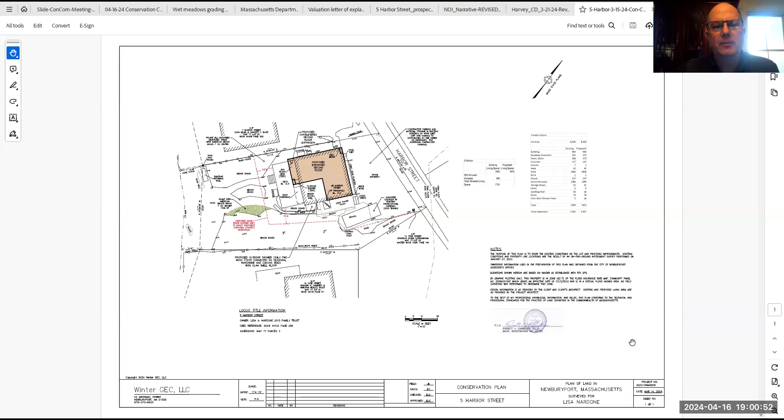The other thing we did is we had the structural engineer's letter updated to reflect the plan as submitted, so it doesn't have the expansion of the deck included in it anymore. So that simplified that. The only other thing I want to note is on our site plan, the planting area that's shown, we don't intend on doing that with the RDA. That was originally put on there because we were going to be proposing a shed. If we do come back in with the shed, we'll be putting the planting area back in for that. But there's no impact outside the footprint of the home. It's a pretty straightforward plan at this point. And we have plenty of driveway for the dumpster and contractor parking, et cetera. So we do not anticipate any impacts.

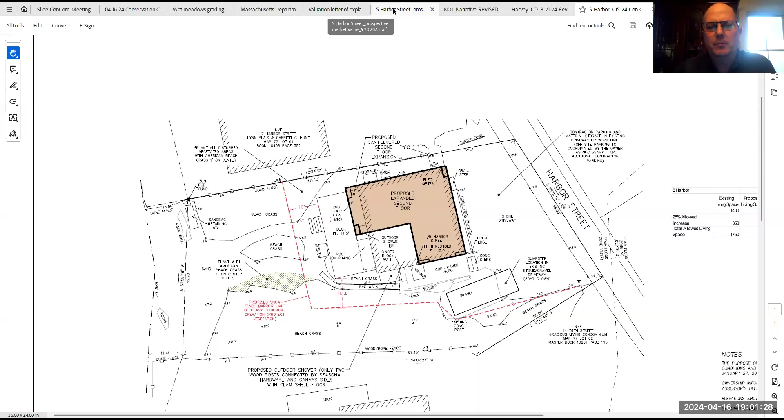So I think at this point, Tom, because we only got the information late this afternoon sometime, we're probably going to continue this just because we haven't had any time to look at any of the documentation. Yeah, I mean, that's fair enough. What we submitted is pretty straightforward, and the valuation letter of explanation is, I mean, it's literally got it

all in one paragraph. Somebody's got loud music playing. Yeah, sorry, that's me. Listen to us, Carol, please.

So if we go a little bit further, I think there's a paragraph that pretty clearly lays out. So right there, as-is market value is 1.28, but you take out the land and you end up with 630,000. And then when it's all done, it's worth 1.45, and the improvement's 800. So it's less than a 50% increase in the value of the improvement, which is the building. Okay. So that's pretty straightforward.

Again, I don't want to push the commission past its comfort. I acknowledge we just got that material into you. I got the last piece of it on Friday. I was out in the field all day Friday, and obviously yesterday being a holiday. So if the commission's uncomfortable moving forward... but the information's all there and it's all supported by Greg Story's typical highly detailed

reports. And then the structural letter is essentially what you saw last time, saying that the foundation is fully capable of supporting the addition. And it just removed reference to work that was related to a deck expansion. Okay. All right. Anything else? No, that's it. So if the commission is comfortable voting, we'd love that. If not, then I would certainly agree to a continuance. I'll leave that up to the commission and your discretion.

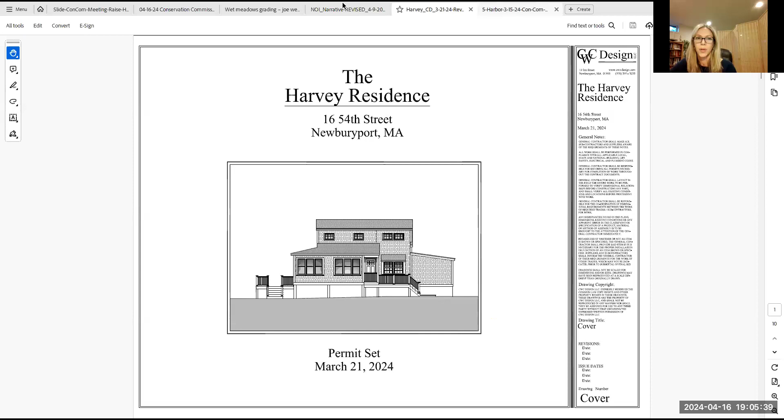Maybe that's it. So, okay, now we have Chris Crump, who is the project architect, and it looks like Dan Wells from LEC Environmental, who is the consultant on the notice of intent. This is the revised notice of intent, which we received this afternoon also. So why don't you all run through this with us and give your presentation on the project. I also have the project plans up here. Good evening. Could I share my screen? This is Dan Wells. Yep, sure. Great.

All right. Thank you very much for meeting with us tonight. I'm Dan Wells with LEC Environmental, and Chris Crump, the architect, is here as well. I just wanted to start by giving a quick overview of where the project is located. You can see it's right above the town line with Newbury, and it's right on the edge of the Merrimack River. And this is a zoom-in aerial photo of the lot, 16 54th Street. The project is a small addition extending off this corner of the house. It's 116 square feet in extent.

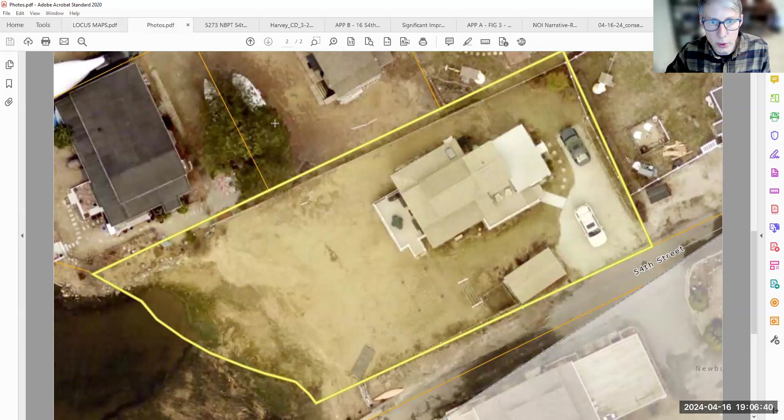This is a photograph of what it looks like there today, and the addition would go just right in this area, just extending off the house. And these existing plants would be temporarily relocated and then replanted at the completion of the addition.

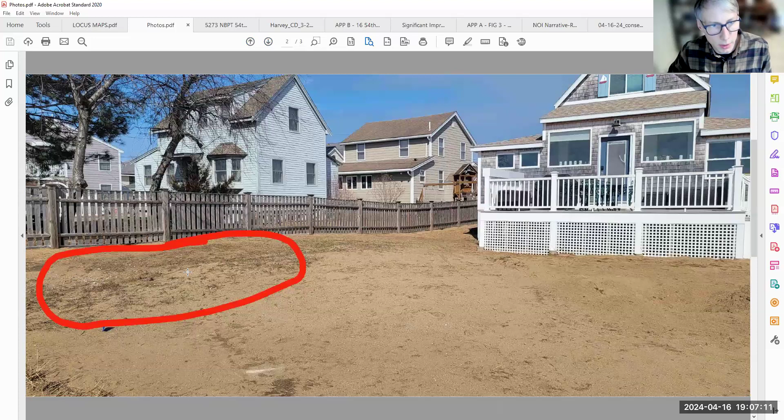The project's also going to be providing some mitigation. This is a part of the backyard, and this is going to be planted with American beach grass in a square footage, 1-to-1, 116 square feet of American beach grass, which is going to enhance the coastal dune.

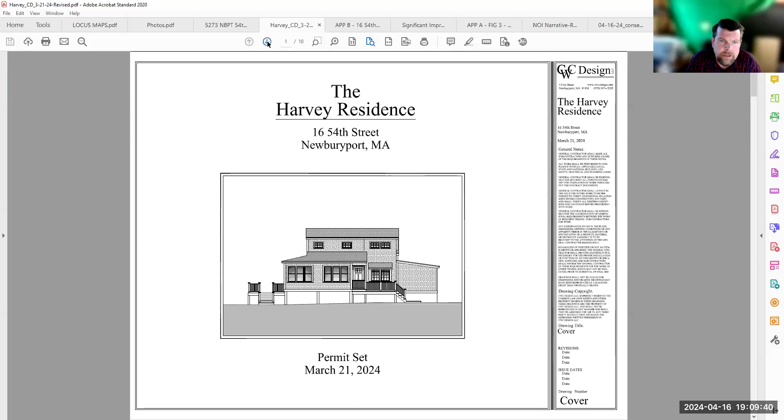So if you were right in front of the front door, there's a deck there, and the expansion would come out just even with that. So the tricky part about this is the existing floor for that dining room and mudroom and the kitchen area is in fact not 2 feet above floodplain. It is into the 2 feet above floodplain by approximately 4 inches.

And so what we are looking to do to be able to get this above the floodplain is we're going to continue the floor of the living room over the existing floor of the mudroom and dining room to get the new construction 2 feet above the floodplain. And that would raise the floor up in that area to make sure that the new construction is above the floodplain and meets all criteria for that aspect of it.

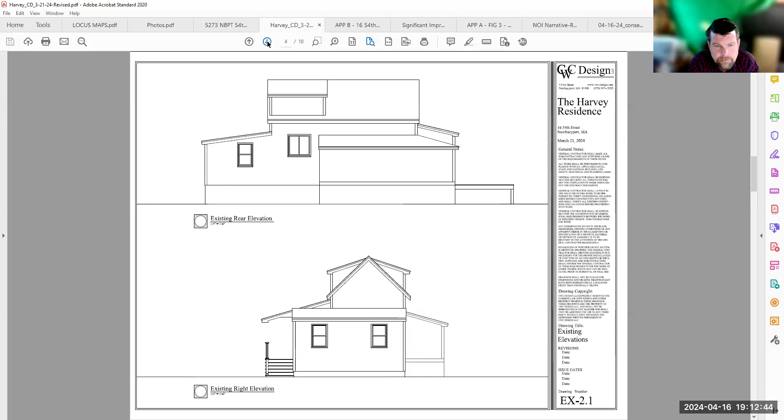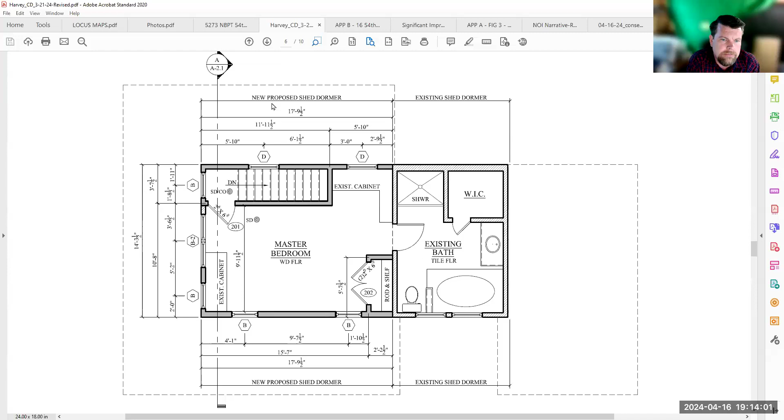And the next slide. And on the second floor, we're reconfiguring the stair that goes up to the second floor. Can you zoom in on this a little bit? There we go. Perfect. So you can see at the top of it where the proposed new shed dormer is and where the existing shed dormers are. There are existing shed dormers on both sides of the existing house. We're just extending the existing shed dormers all the way across to provide more headroom upstairs, because right now the walls on the top and bottom of that floor plan are about 2.5 to 3 feet high. So we're just trying to create more headroom. Next slide.

There we go. So this is what we plan to do on the proposed addition. The new addition on the first floor, the joists would cantilever over the existing structure that's there now, and then we'd have pilings that go in on the outside corners of the addition to give them the necessary structural support. And so everything would be open to below. There is an existing foundation under the main rectangular box of the original house. But there are no mechanicals in the basement anymore. They moved them all up above.

So there is just literally an open crawl space that's probably about 5.5 feet high, I think. The owner said that she's 5'4", and she can stand up in it, but that's about it. She almost hits the ceiling there. So it's a very low crawl space underneath the existing. But the wraparound lower level that you see on there existing is all on pilings already. So it's just the original center core that has a 5-foot crawl space underneath it.

So in this concept, we're not increasing the existing main ridge height. And we are minimizing as much as possible the extension of the proposed addition. We wanted to just square it up with the existing deck. We didn't want to push it out any further than that, trying to make sure that we don't take any more land than we need to expand this. Again, as Dan mentioned, it's about 116 square feet of additional first floor space. The next slide. I think that's about it.

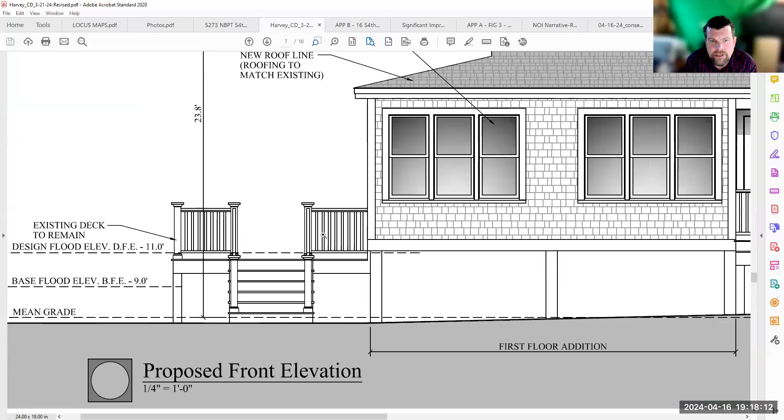Okay. Will the entire first floor now be 2 foot above the base flood elevation? Nope, the new construction will be 2 feet above, the new construction addition of the 5 feet going out. If we can go back to the floor plan, please, and just zoom in on that a little bit. Okay, so that whole entire dining room, mudroom area will be up above the floodplain, including, if you just scroll up a little bit, the existing living room is also above the floodplain.

The existing structure, you'll see on the left-hand side, there's the words 1 step down. That's the existing kitchen area. It would step back down into the existing kitchen. Now, that mudroom portion that you're going to be constructing above, are you going to leave the existing flooring? Yes. Okay. It'll only be the existing structure that's there. Any new construction would be on top of and 2 feet above the floodplain. The bottom of the new structure would be above the 2 foot floodplain elevation.

Did you consider bringing the rest of the first floor level, not having this step, but putting everything above the floodplain? We did, but that's a full kitchen that is not extremely old. I don't know when it was done, to be honest with you, but it was done at some point. To take that and raise it up would put us way over the construction costs of what we would be allotted to do on this project.

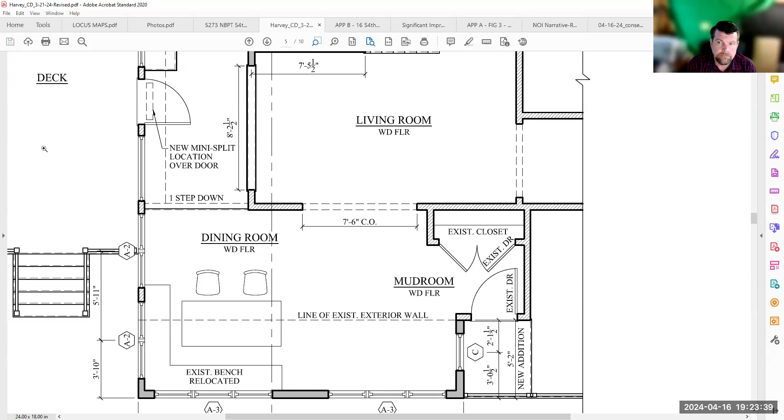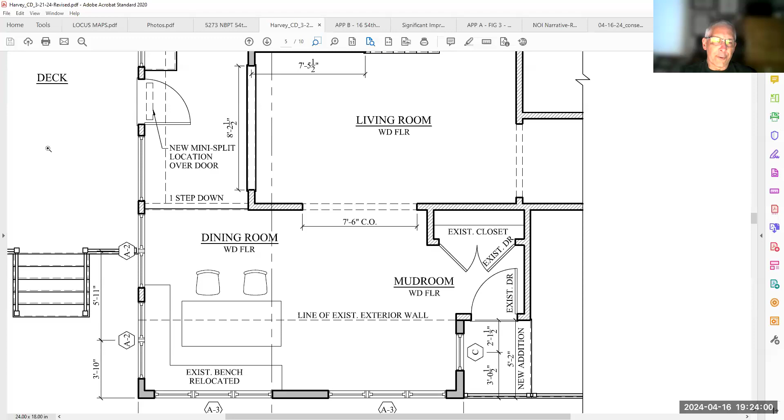Also, just for an FYI, we're not gonna vote on this tonight just because the last information we got came in at 4 o'clock, and we needed it at least a week or 2 weeks ahead. I can't remember, but anyways. Understood. I totally understand that.

And because we haven't seen that documentation, I don't think it was ever on the website for us to look at. Which one, sir? This is what would have been uploaded today, this form. Yep. So that form is good, but that doesn't really mean anything to us unless we have the post-construction appraisal. So you only gave us the existing conditions appraisal, and what we're looking for is a comparison between existing and proposed. And so that form doesn't tell us that either.

This was the appraisal report, so I guess that wasn't clear to me. So they reported the property value is 1.2 million, and then the improvement value is 408,000. Yeah, that doesn't represent the proposed conditions. Well, you don't just add that to the. When I looked through this appraisal report, a couple things became clear. There's one appraisal, the appraisal of the existing conditions. It shows that the property value, the entire property, meaning the land and all the structures on the land, is 1.2 million.

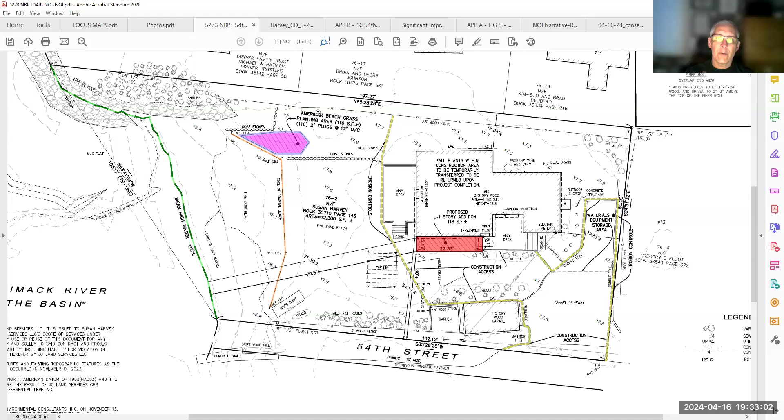I don't have anything else. Anybody else in the commission have a question? No. For now, anything in the future, we'll send to Julie and she'll share with you guys. Okay. Also, does anybody from the public have any questions?

I see someone named Jillian. If you want to say something, Jillian, raise your hand. If not, that is fine. And it looked like Jillian wants to say something. Julie, can you... No, I'm sorry. I just thought you wanted to say like, hi, welcome to the group or something. This is my first meeting. Oh, sorry, Jillian. No, if you've got any questions on the project, it's up to you. If not, you're all set.

All right. Very good. Okay, so, get a motion to continue this to the May 7th meeting. So moved. Second. All right, roll call: Steve Moore, yes. David Vine, yes. Carol Wagon, yes. Bill Mullen, yes. And I vote yes. All right, thank you very much. We'll see you in May.

Thank you everyone. I appreciate your time. Have a good night. You too. Thank you. Thank you. Good night.